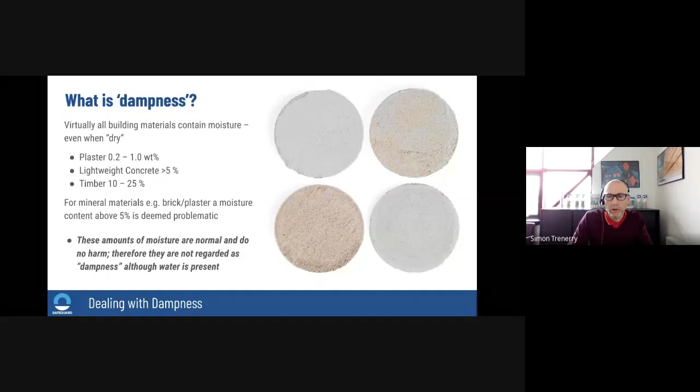What is dampness? Virtually all building materials contain certain trace levels of moisture, even when they're technically dry. So even dry plaster on a wall that's been up for, say, a year or two will still have a very small percentage of moisture, possibly 1%. Timber varies a lot in moisture, whether it's indoors, outdoors, whether it's treated, etc. Broadly, a certain amount of moisture in building materials is not an issue, and they're designed for that. However, when it reaches a certain point, it starts to cause structural and decorative damage, and in turn can also cause health issues for occupants of properties affected by dampness, and that's what we're going to be looking into today.

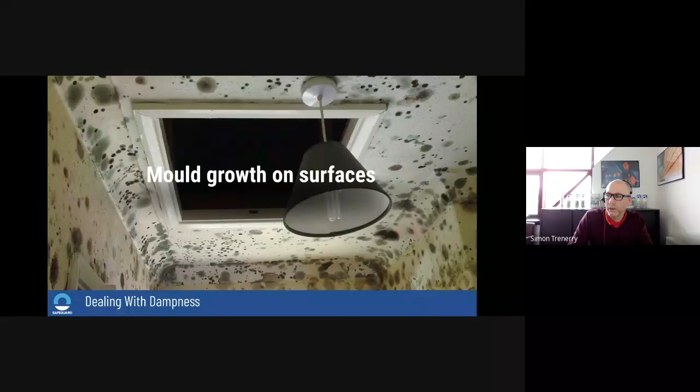Pooling of dampness—this is condensation, pooling of moisture, forming of moisture on the surface, absorbing into surfaces. That can often lead to a growth of mold on surfaces. Obviously this is an extreme example in this slide, but it can lead to that. It can also lead to damage. Even brickwork is not immune to damage by water. Bricks get sodden, and that can lead to frost damage as the moisture freezes and causes spalling, or also salts, which are transmitted in rising damp in particular, can also cause physical damage to building materials.

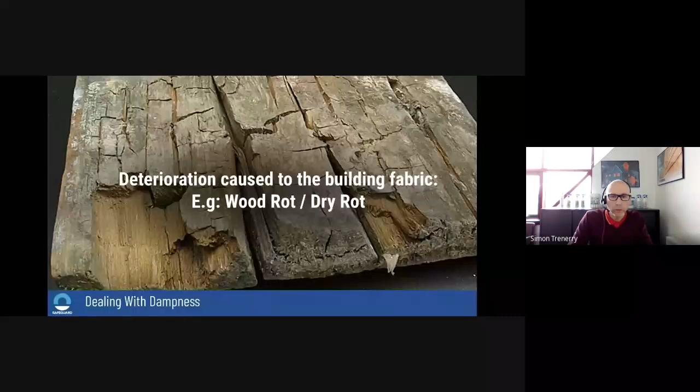And of course, dampness can cause deterioration to the building fabric. Where timber's concerned, it can lead to rots, and the presence of rot often in itself is an indicator of the presence of wood-boring insects, commonly referred to as woodworm. There is no one specific woodworm, it's a group of insects that are broadly colloquially called woodworm.

So why treat dampness? There are practical reasons to rectify and address all of the problems described on the previous slides, but also there's legislation and regulatory guidelines behind this. The Building Regulations Part C, which covers how buildings are built, the Housing Act, Decent Homes Standard, and the Homes (Fitness for Human Habitation) Act are all legislation or regulatory guidelines that govern living conditions within properties, particularly rented properties. Most of the legislation is towards rented properties, but there's also legislation that covers properties generally. The Housing Ombudsman, the parent body for the social housing sector, brought out a report back in 2021, Spotlight on Damp and Mould, which was a groundbreaking report and set strong guidelines for social housing providers on the services they need to provide and how they need to deal with tenants experiencing dampness and mould in their properties. So there are a lot of reasons to deal with dampness and mould, and we need to take it very seriously.

Another good reason is energy saving. Damp building components - and by components we mean the fabric of the building: bricks, blocks, plaster - are poor insulators. Wet walls conduct twice as much heat as dry walls. We're all trying to save energy, and we're all finding the rising costs of energy hurting our pockets. What can we do about it? Well, by keeping our buildings drier, less energy will go out through the walls, therefore we'll spend less on heating. It's a fairly simple equation in theory, though obviously it takes work to get there.

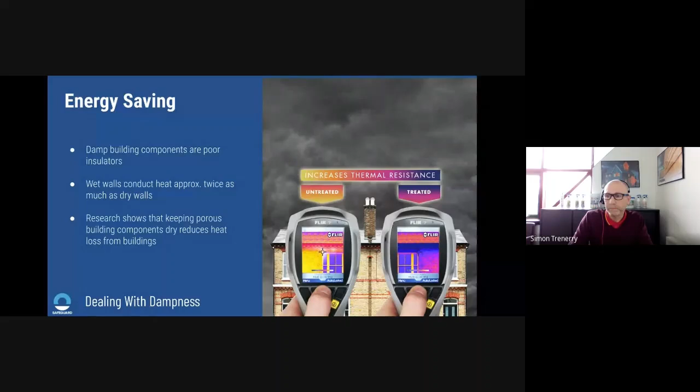So let's look now at the three main causes of dampness found in buildings. There's a principle to bear in mind: the key to dealing with dampness is the correct identification of the cause. We always encourage a principle followed by many contractors and industry professionals - a three-step process: identify the cause of the dampness, deal with the cause of the dampness, then carry out remedial treatments - replastering, redecorating, etc. Sometimes people don't understand this. They see dampness and straight away replaster, for example, and then the dampness comes back, because they're unaware of or haven't followed this principle. So it's an important principle, and I'd always encourage people to bear it in mind and follow it.

Penetrating damp is a very common form of dampness. Dampness comes in through the structure of the building, either through the walls or through the ceiling, and causes damage to the building. And then, of course, there's rising damp, which I'm sure many of us have heard of. We're going to explore these in a little bit more detail now.

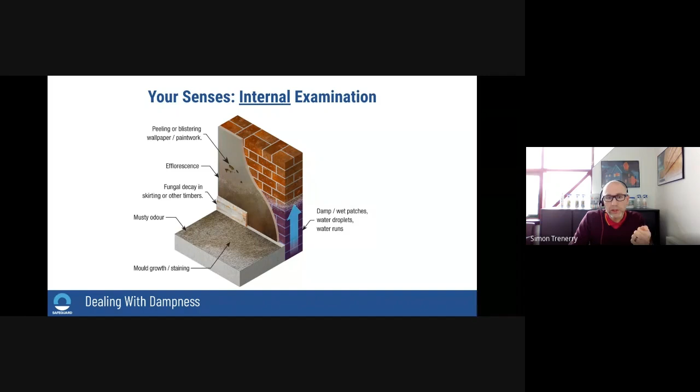a damp, musty smell is the first indication of dampness, particularly if you've got rising or penetrating damp. You can also use tools to help you. Moisture meters are commonly used to investigate all three kinds of dampness. Now, moisture meters are technically designed for detecting moisture in wood, but you can use them in other applications. Admittedly, if you use them on brickwork, on plaster, on paint, etc., then the readings they give are indicative, but you can still use those to build up a pattern of the dampness, which can often help with identification. And if you're dealing with moisture, with timber, they can give you an accurate reading on the levels of dampness, which then lets you know if you need to take action.

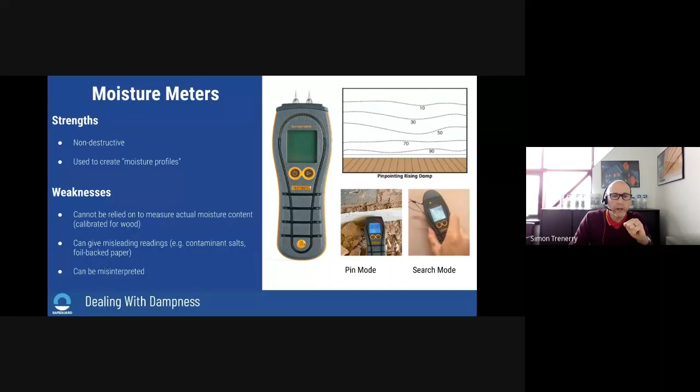As I mentioned, it's the most common form of dampness in buildings. Broadly, warm air, which you typically get inside a building, can hold more moisture than cold air. When that warm, moist air comes in contact with a cold surface, such as a cold window, it's cold outside, your house is warmed, middle of winter, it's a cold night outside, you've got warm, moist air in your house, that air then cools, that reduces its ability to contain moisture, and that moisture is then deposited on surfaces as a liquid. If it's an impervious surface, it forms as drops, and if it's an absorbent surface, such as plaster, perhaps timber, then it can be absorbed and can lead to damage.

This condensation, obviously, most properties will suffer from it at some time or another, but it's a problem that's actually getting worse, simply because as we insulate our buildings better, which is something we're all keen to do, to prevent energy loss, reduce our impact on the environment, and of course save us money, and because modern buildings are designed to be more airtight, this is great in many ways, but of course this reduces air movement in and out of a property, and then leads to the air getting warmer and carrying more moisture. And then if it does encounter a cold surface, such as an uninsulated external wall, cold window, etc., then that can lead to deposition and condensation. So condensation is actually becoming worse in modern houses rather than better, typically, of course.

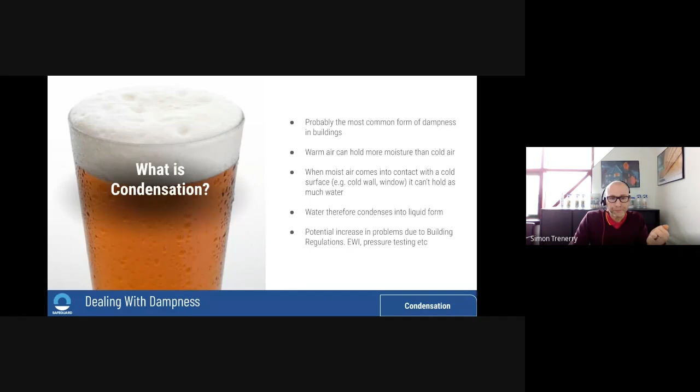So where does this moisture come from in properties? Well, when a new house is constructed, estimates are 4,000 litres of water are typically used when building a house. You've got water in the mortar, water in plaster, water in many elements of the house, which then takes time to dry off, which is when builders finish constructing a new house. They typically leave it for a few months to breathe, to dry out before the new owners are able to move in.

But in existing houses, we all produce moisture simply by breathing. So even when you're asleep, you're producing moisture, comes out through your pores, comes out in your breath. And of course, when you carry out normal human activities such as cooking, bathing, drying your washing, all the normal things we do as people, all of which create moisture. And also don't forget, in this day and age, many of us are living with more people in our houses than used to be. You've got extended families, you've got different generations living in, maybe grannies come to live with you, we've got houses in multiple occupation, so we've got higher occupancy levels, and of course we've got pets, they're breathing as well.

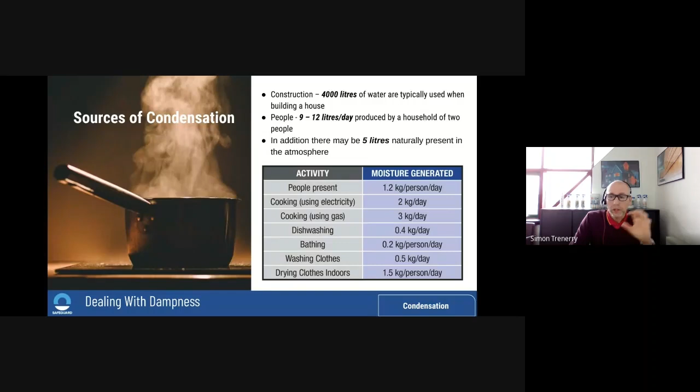So there's a lot of moisture generated in our properties, which then goes into the air and can lead to condensation. So as I'm sure you'll realise, condensation typically occurs in the cooler months. Why is that? We've got our window shut, we go out less, we crank the heating up, it's cold outside, so we're all indoors, we're all carrying out human activities, generating that moisture, that goes into the warm air in our heated homes, and then when that encounters a cold surface, that can lead to the deposition of condensation.

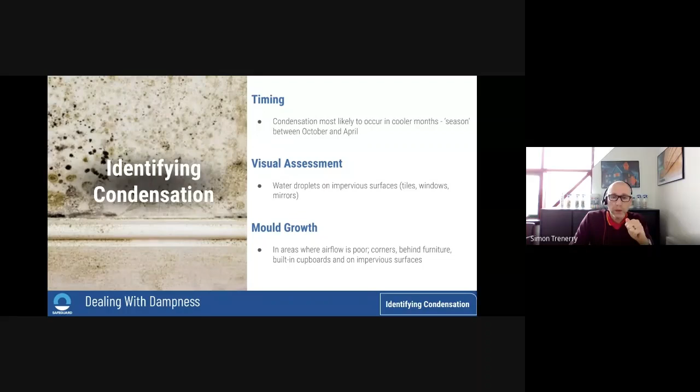Areas to look for: obviously windows, window sills, those kind of areas, but also where air flows poor, in corners, behind furniture, in cupboards - typical places where condensation forms, and then that can lead to mold growth.

So measuring condensation, separate to using a moisture meter, which can detect presence of condensation on a surface, but often we can typically see that. If you want to measure where the condensation is in your property and try and get a better grip on it, then there are a couple of tools you can use.

Surveyors often use hygrometers, which are handheld devices which measure the water vapour in the air. That's fine up to a point, but a more popular tool for measuring and mapping condensation and working out what's happened when is a data logger, which is a small device.

It's fixed either with Blu Tack, tape, possibly some kind of adhesive, into a corner of a home and just left for a while - weeks, possibly a month or two. The idea is it takes periodic readings over a period of time.

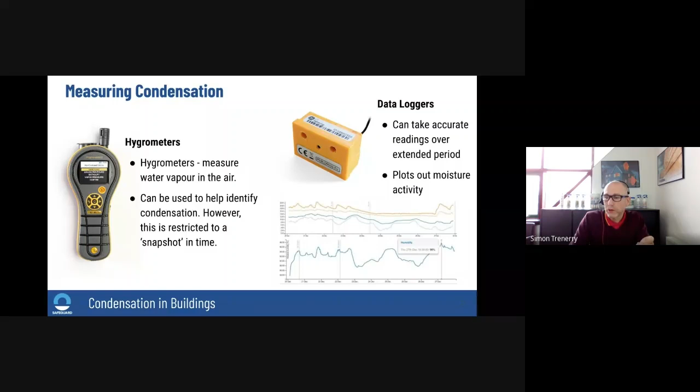These readings are downloaded onto computer software, and then that's used to map graphs similar to the ones in this slide here, which can then be used to plot when the condensation's happening, and plot that in terms of temperatures and humidity, and try and work out what's causing it and why it's happening. Sometimes where there are issues with condensation that people just can't get to the bottom of, data loggers are an ideal tool to identify what's happening and why.

So condensation, the formation of condensation itself isn't necessarily a problem, but the water itself - it's very pure water, it's distilled water - but it provides the ideal medium for mold growth, which is a concern for many of us, because not only does it look awful, but it can have a potential impact on human health.

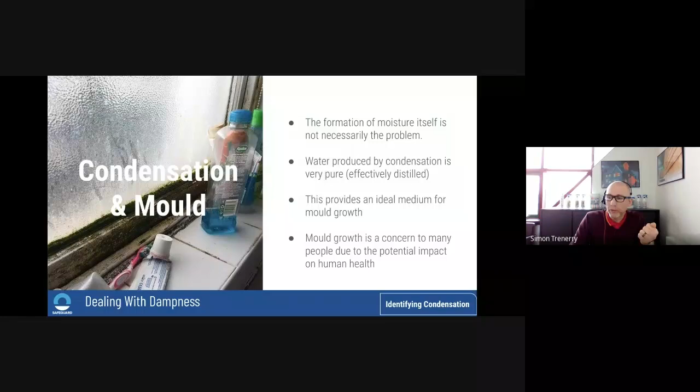So dealing with condensation and mold growth, what can we do about this? Well, in theory, reduce moisture production. Open your windows - okay, easier said than done, particularly in winter. We don't want our heating to all go straight out the window.

Drying clothes outdoors, again fine in summer, but what can you do in winter? You need to dry them indoors. Vent your tumble dryer outside - if you've got one, that's fine, if you've got an outside wall to vent it through.

Use of gas and electric cookers, okay, but you've got to cook. Extractor fans, great if you've got one fitted, not every property has. And again, keeping trickle vents open can help to get that damp, moist air outside, if you've got trickle vents.

So these are great solutions in theory. Whether they're practical, well, that's debatable, but certainly it's worth bearing in mind they are, in theory, simple and cheap ways to deal with condensation.

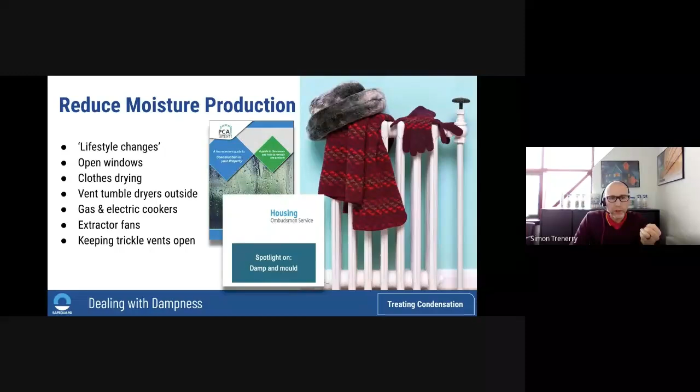Increasing the air temperature, again in theory, by keeping the air consistently warm, you will keep that air - it will still have the ability to carry that moisture and be less chance of it being deposited on surfaces as condensation. Again, fine in theory, but when we're all finding the cost of heating our homes is hurting our pockets more and more, we may not have the ability to do this. So again, this is another solution that is great in theory. Whether it's practically possible depends on our individual circumstances.

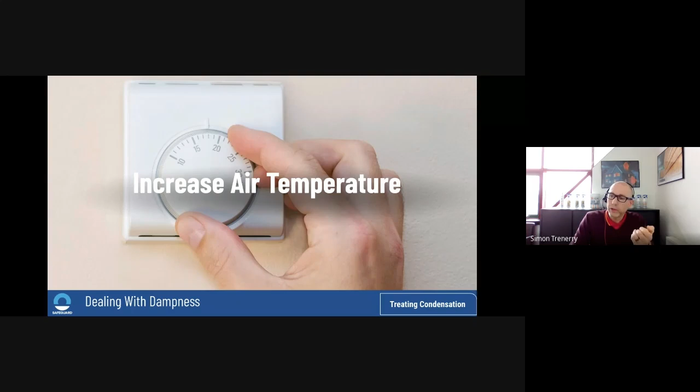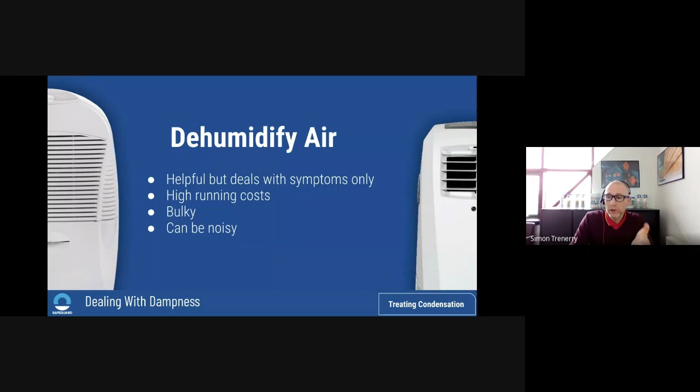Using dehumidifiers to treat condensation - this is one solution, but again it's another one where perhaps it's better as a theoretical solution than a practical solution. It deals with the symptoms of condensation only, by reducing the moisture load in the air, but with high running costs, they use electricity. They're quite bulky, they can take up a lot of space - depending on the size of your property, might not be something you can deal with - and they can be noisy to run, and typically they run at night when you're trying to sleep. So again, this is a solution, not necessarily practical.

Improving ventilation, this can help. If you've got air bricks, make sure they're unblocked. If you've got trickle vents, leave them open, though in all fairness, along with the air going out, you will lose a certain amount of heat. If you've got an extractor fan fitted, consider changing it. If it's a traditional timer extractor fan that runs for a few minutes after you've turned the light off in the kitchen or bathroom or wherever you've got it located, that's fine, but when the timer switches off, that won't necessarily have set the humidity to where you want it to be.

So consider replacing that with a humidistat fan, which is a fan with a sensor that detects humidity to a certain level you set when it's installed, and it just runs as needed. These are very useful.

Or positive pressure units. These are very popular over in Europe and are increasingly being fitted to new properties. Not so easy to fit to existing property because they're fitted in a loft, so if you've got a loft conversion, you'll struggle to find somewhere to fit the fans. They also use ducting to move air around your property, bringing air in from outside and forcing it around. The idea is to encourage air movement and get that warm, moist air outside before it comes into contact with a cold surface.

So they're great in theory, but as a retrofit, not necessarily so practical, because the ducting's got to be run somewhere, which can involve taking ceilings down or floorboards up. Not necessarily practical for every property, and as I mentioned, it depends on whether you've got space in the loft. But basically, we work on the principle of moving warm, moist air outside before it's got a chance to condense on a surface.

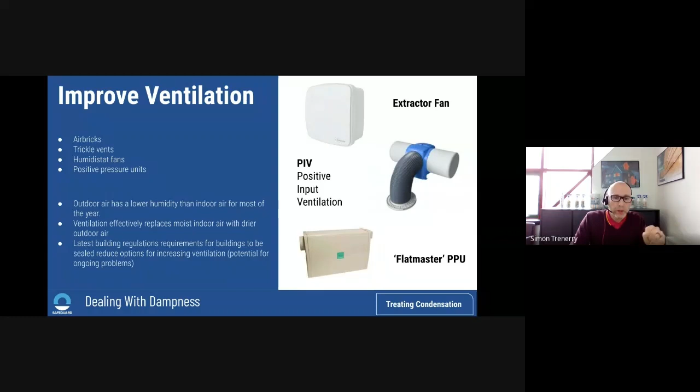So, preventative measures, taking all of the previous solutions into account. You can't reduce moisture production. Keeping your heating up isn't necessarily practical from an affordability perspective. You might not be in a position to fit or change an extractor fan, or run a dehumidifier. So what else can you do? You've got condensation forming in your property, you know it's happening - what solutions can you apply other than that?

You can use anti-condensation paint. These are a version of emulsion paints, but they've got small glass spheres in them, which slightly increases the temperature of the surface the paint is applied to and reduces the risk of condensation forming. Drawback with these: the paint has a rough surface, as the glass spheres don't give it the usual smooth finish we're used to. Some people don't like that.

It only comes in a limited range of colours, so it may not be suited for every property, because you might not want your house in magnolia or white or whatever. Also, it makes a small difference, but depending on the severity of the condensation issue, it might not be enough to deal with it. So it's one solution, typically used in small problem areas - if you've got a corner of a cupboard or a room prone to condensation, this is a great solution, but it's not often used on larger areas like whole rooms.

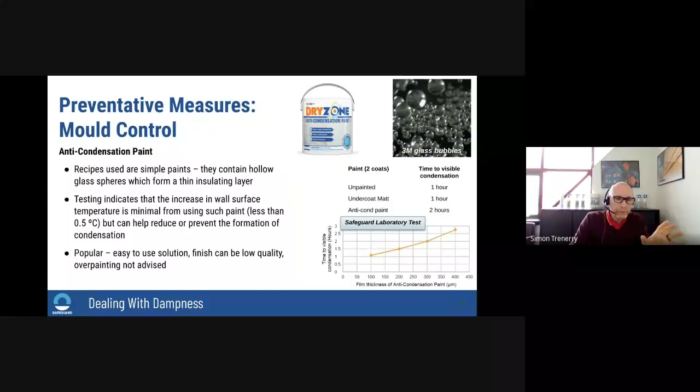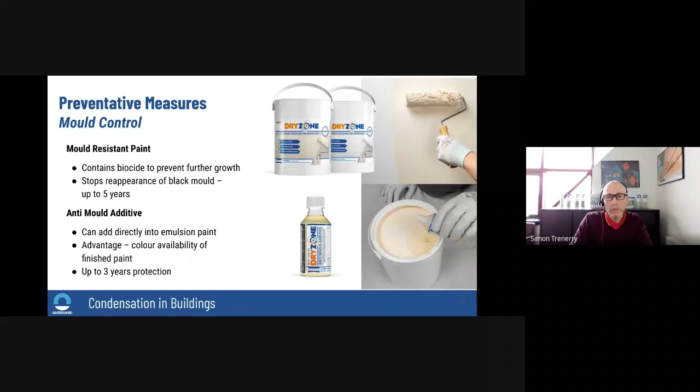A more popular solution is anti-mold paint, or mold resistant paint. These are normal emulsion paints used the same way as any other emulsion on a wall, but they've got a biocide in them. They come in two forms. We supply them ready mixed, with precise amounts of biocide applied to specific paints we supply, and they'll stop the appearance of black mold for up to 5 years. Condensation can still potentially form on the walls, but because of the biocide, no mold will form.

Drawback with these pre-made paints is a limited range of colours. So if you particularly want a specific colour or brand type of paint - there are lots of decorating suppliers out there doing thousands of different colours and types - and you want something not covered in our range, then anti-mold additive is the solution. It's a simple additive mixed in with whichever emulsion paint you choose, and it's a biocide again, giving up to 3 years worth of protection. Typically, people redecorate after 3 years anyway, so that protection is often enough.

And these solutions are really, really popular, both with private and social sector landlords, simply because they can be applied between tenants. From a landlord's perspective, it removes any concern about mold forming - you've carried out your responsibilities and due diligence, and it means less concern about decorative spoiling at the end of a tenancy. And of course, tenants like them too, because if these are applied, they don't have to worry about mold formation through their normal activities like cooking and washing.

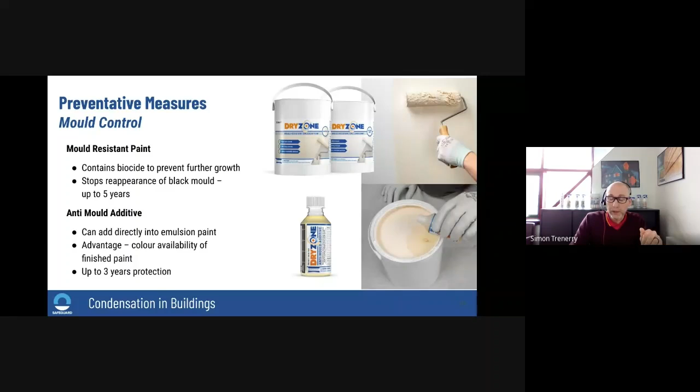These are popular solutions, and incidentally relatively inexpensive. Anti-mold sealant - I'm sure we've all seen these, and many of us use them. When you're having decorative work carried out, a new bathroom fitted, new kitchen fitted, new loo, whatever, use an anti-mold sealant. It's a standard silicone sealant, but it's got a biocide in it. It stops mold forming, because if you use standard silicone sealants, you can get black mold forming on those very, very quickly after they've been installed.

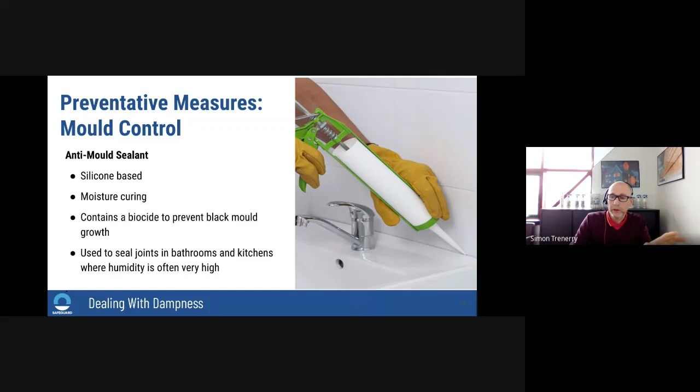Another solution to deal with mold is removing the mold itself. Traditionally, people used to just wipe the mold away or use bleach. Unfortunately, mold - think of it in terms of a plant. There's the black mold you see, but it's also got roots. So if you use warm soapy water, or bleach, all you're doing is taking the mold off at the top. You're leaving the roots in there, which grow back very quickly. In fact, when you're wiping it in that fashion, you're actually spreading the mold, and typically the mold problem gets worse when you've used those solutions.

So the modern solution is to use a two-step product, a mold eliminator and sanitizer. You spray the mold eliminator on, leave it a few minutes to work, wipe it off, spray the sanitizer on, leave it a few minutes to work, then wipe it off and give the surface a good wipe over. So you've killed the mold and removed it. Then if you paint over with a mold resistant paint, the ones we've just discussed, you've got a nice brand new surface that's mold resistant and prevents the formation of mold. This is a really popular solution where you've got, for example, mold on your bathroom ceiling. Apply this - again, all inexpensive products, easily applied, and they do a great job. Very well worth considering.

I've covered a lot of this, but incidentally, the mold eliminator and sanitizer, we supply it in a couple of forms. Small handy spray bottles that can be used by anybody - keep them in your bathroom, have them at hand. But we also now supply in larger commercial packs. This is aimed at, for example, social landlords - you might be a housing association with 5,000 properties, and you want to go around and treat all your properties over the winter. We supply in large bottles, large containers with sprayers, so it can be used by teams carrying out maintenance work. That's very popular, particularly with commercial customers of ours.

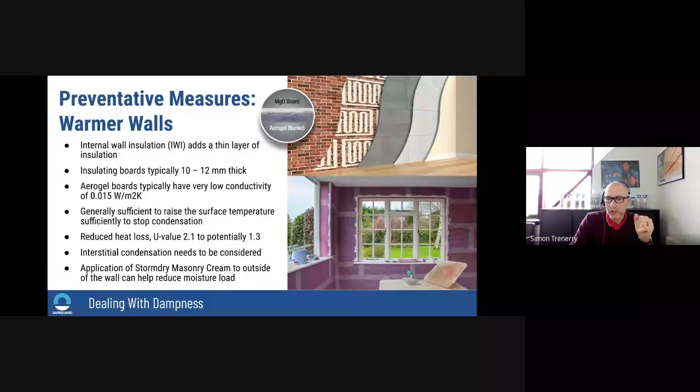These are typically used in conjunction with Stormdry Masonry Cream, so not only does it keep the wall drier, but if you have a cavity wall, it also reduces the potential for interstitial condensation.

EP board is one of the two insulations we do of this thin insulation type. It's easy to install, basically adhered to the wall using adhesive. It saves space and it's also breathable, so it doesn't reduce the wall's ability for moisture transfer.

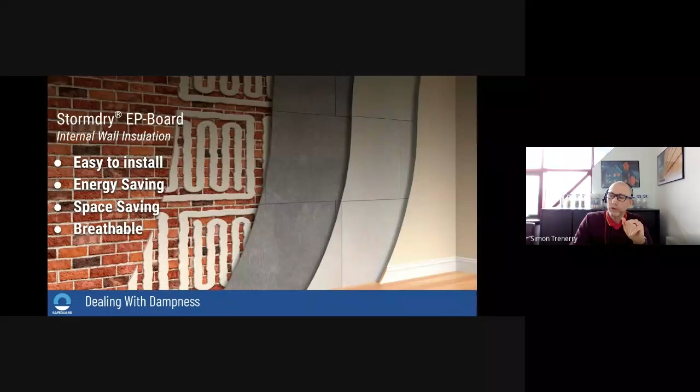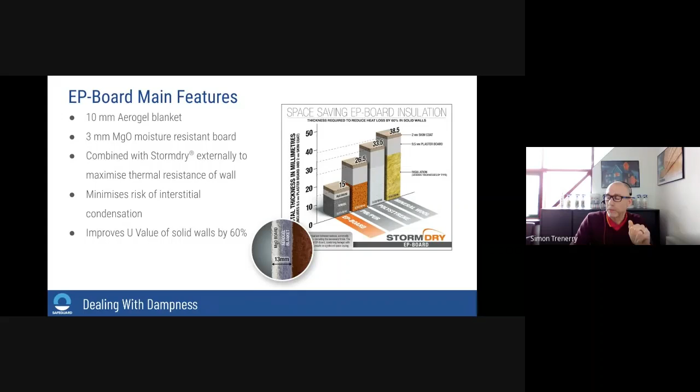So it shows how well these types of insulation perform—they make a big difference. However, there is a trade-off: per square meter, these kinds of insulation are more expensive than the thicker ones. You pay your money, you take your choice. But if space is your primary goal as well as heat saving, these are well worth considering, and they do a great job at reducing the likelihood of condensation forming.

Our other version is Ultrotherm, which again is similar to EP board in that it's adhered to the wall, creates a warmer surface, and cuts down energy loss, but doesn't perform to quite the same high level as EP board. So you're better off considering this more as a solution just to help prevent the formation of condensation.

So if you've got, for example, a wall or room particularly prone to condensation forming on the walls—maybe it's north facing or coastal facing, single skin, with a lot of issues with condensation forming—this is worth looking at as a solution.

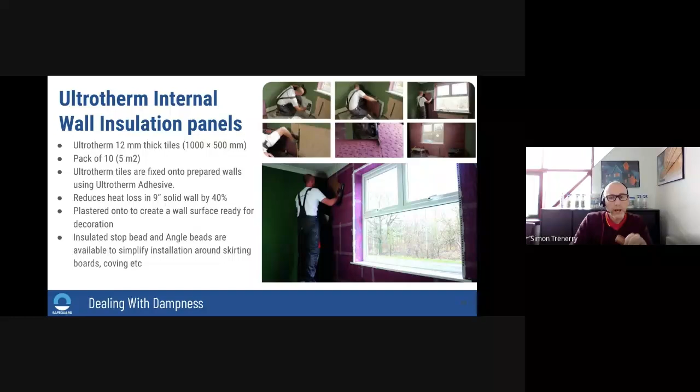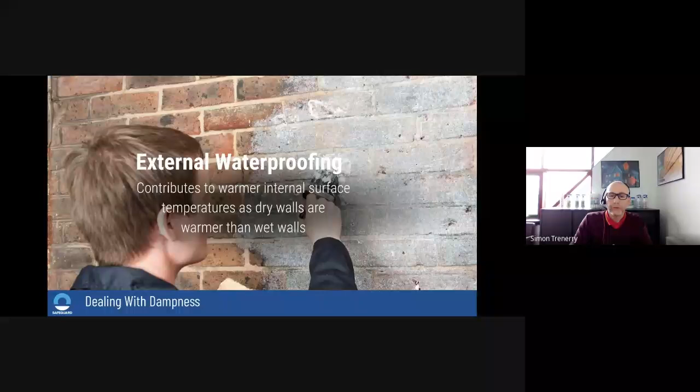Another solution you can use is external waterproofing. This contributes to warmer internal surfaces because dry walls transmit less thermal energy than wet walls. If you can keep that wall dry by applying a waterproofer, the wall will transmit less thermal energy—the inner face will be warmer and you'll lose less heat through it. Again, this is a very popular solution.

Okay, let's look at penetrating damp now. As I mentioned earlier, penetrating damp can come in through the roof or through walls. We don't get involved in roofs other than in relation to chimneys, so we won't cover roofs, but it's worth bearing in mind that roofs are one vector for penetrating damp. Typically it's more likely to enter through the walls, and it can enter through single or cavity skin walls, through wall ties, or through cavity wall insulation, which we're going to look at now.

Just bear with me a second, please—I'm just going to grab a mouthful of water.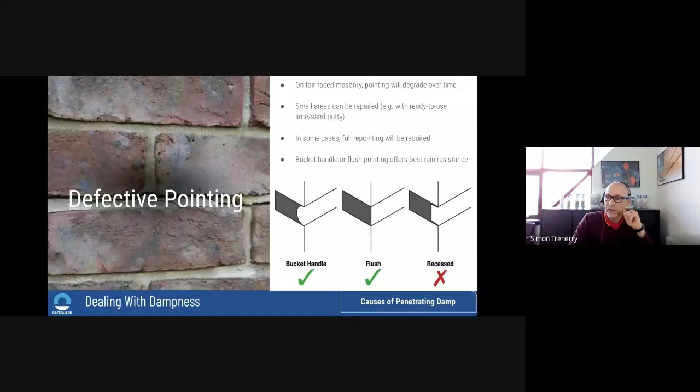And here's an example of mortar not being in great condition. Pointing on walls, depending on how the wall's pointed, the age and condition of pointing, is a very common vector for moisture coming in. In this slide you can see some cracking just over there next to the pointing, and that can allow moisture to get into the building. Also the shape of the pointing matters - there are 3 examples here. Pointing should be either bucket handled, so it's concave, so even wind-driven rain will go in there and run off, or if it's flush it will run off. But recessed pointing, which was very popular in the 70s and 80s, can effectively form a recess where moisture will sit in, and if it's not blown away by the wind or doesn't evaporate, that can work its way into the building and lead to penetrating damp happening.

Defective flashings, another common cause. A lot of flashings are at high level - abutments from flat roofs, abutments around chimneys, etc. People can often not be aware that where these are chased into the wall, they've come away, or the flashing itself is deteriorating, and this can be a vector for moisture ingress.

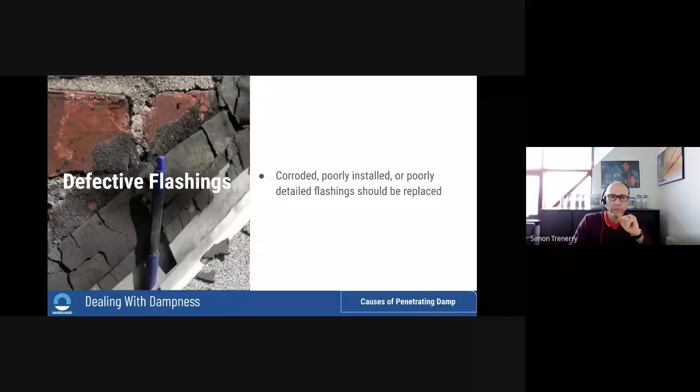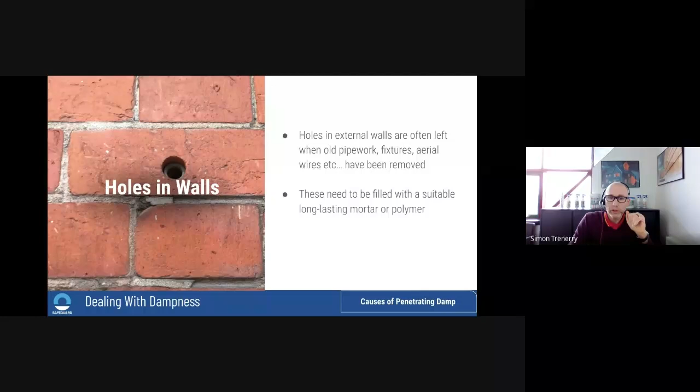Holes in walls - cable entries, you used to have a satellite dish fitted, now you've got cable or something different, that's taken away but the hole's not filled. Pipes that came through the wall, all kinds of reasons we can have holes in our walls. Old extractor fans that have been removed - these can be vectors for moisture, so they're worth assessing and dealing with if you've got issues.

And faulty window and door seals. Up until the modern day of double glazing, typically windows were sealed with cement or linseed putty. That doesn't last forever, and even modern sealants don't last forever. When I had my double glazing replaced last year - it was originally installed in my house when it was built in 1983 - the sealant all around the windows had gone completely brittle, actually like mortar, so brittle it was cracking. I didn't have moisture ingress, but I could have done. So even with modern windows, it's worth bearing in mind that sealants don't last forever, they're vulnerable to UV and will eventually break down. So when you're looking for moisture vectors, that's worth considering.

Porous masonry is another one. It wasn't uncommon in Victorian times for bricks that were fired for internal use to be used on external walls.

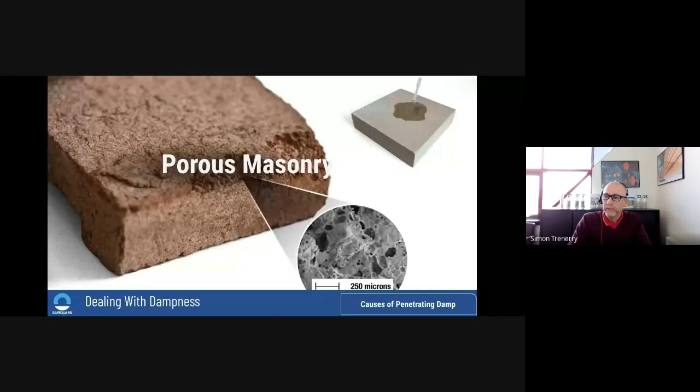So bricks were vectors for moisture, and obviously bricks can be subject to the effects of weathering, pollution, and spalling, which can start to break down the surface. You may not be aware, but bricks are porous anyway, so they're designed for a certain amount of moisture to penetrate, which then leaves the brick due to weathering and the sun.

But depending on the condition of the brick and the weather conditions outside, that moisture can potentially penetrate to the inside of the property. Cavity walls are another possible vector for penetrating damp. When the wall's built, they use wall ties between the inner and outer skin. Older wall ties didn't have a twist in the middle, so if moisture got in, they could act as flat vectors for moisture to run across.

Also, when the wall's built, if the bricklayer constructing it didn't deal with mortar drips inside, or didn't wipe away the backside of the bricks, mortar could drop down onto these ties. As we've already explored, mortar is a great conduit for moisture to travel through. As you can see in this image, you've got a wall tie there covered in mortar, effectively acting as a bridge across the cavity. Rain hit the outside, came through the bricks, and travelled across to the inner skin via that mortar, eventually working its way through and causing damp patches in your living room, bedroom, or wherever.

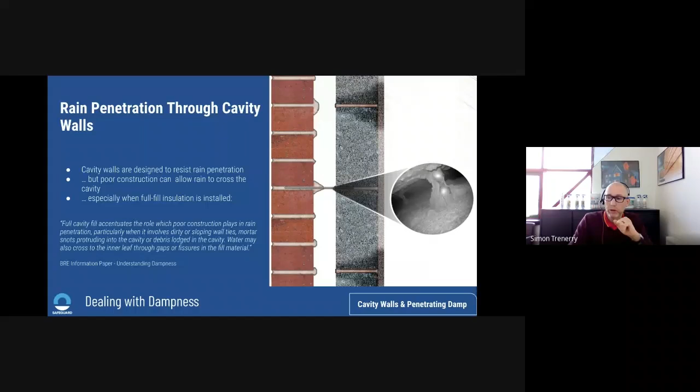Cavity fill insulation - I'm sure we've all heard horror stories about people having issues with this. Cavity insulation is great if you've got a cavity wall. In theory, it's a brilliant solution because it keeps your property warm, doesn't affect the inside space, doesn't affect the aesthetics, and it's great as long as it stays dry. But if moisture comes through the brickwork and gets into that insulation, once it's wet, instead of preventing loss of energy, it actually allows thermal energy from inside to travel outside, and it also acts as a conduit for moisture to come into the inner walls. So that's something to consider as a possible cause of penetrating damp if you're seeing dampness in your property.

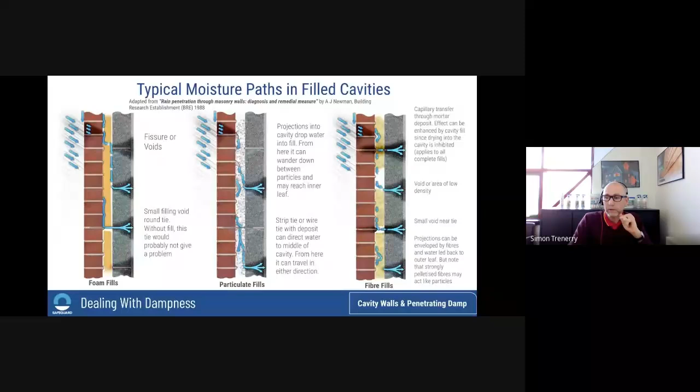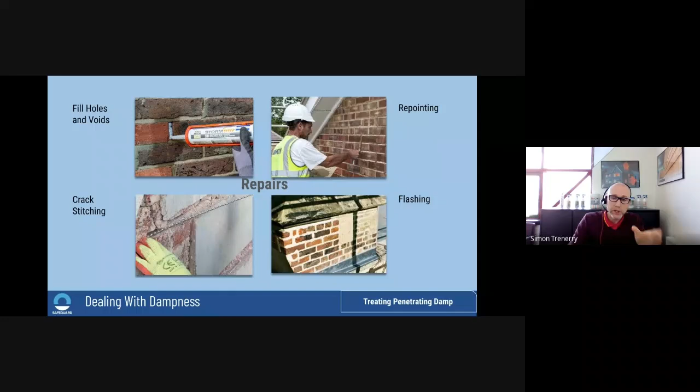So what can we do to treat penetrating damp? A lot of the solutions are very straightforward. You can fill holes and voids in brickwork, replace your pointing, and it's a good idea when replacing pointing to use a mortar additive. We supply a mortar additive which makes the mortar waterproof but breathable - it's worth doing. If you've got cracks in the brickwork, repair those using crack stitching kits, and replace flashings that have failed. They're all relatively easy, relatively inexpensive solutions.

Coatings on the outside of brickwork are a little bit of a double-edged sword. If brickwork's painted outside and that paint starts to crack and weather, moisture can get in behind it and cause the paint to delaminate, come away from the surface, and start to break up. But that can also trap moisture, which can then penetrate inside. So paints are great in good condition, but as they start to weather and break down - perhaps cracking because the building moved in the summer, or it's had a lot of sun, or mechanical damage - they can cause more problems than they save.

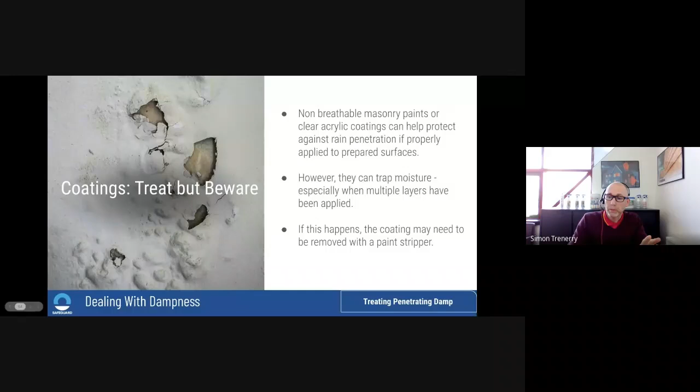Painting over them only adds to the problem, because if you paint over this kind of damage, you're trapping moisture underneath. That moisture is going to go somewhere, and you're going to get problems with the new paint blistering as well, and that moisture is still likely to work its way inside. So if you've got damage to external paint, it's worth simply taking it all off and replacing it.

Much the same applies to render. In this particular image, you've got concrete render on the wall, which is great - it's weatherproof and new - but you can see there's lots of cracks, and you can see where a hole has formed and moisture's got behind, causing this big staining here. If you just patched up that particular area of render, all you're doing is trapping moisture, and that moisture is going to go one of two ways, probably both - causing more damage to the existing render and adding to the problems of moisture getting in, with some of it tracking inside. So really your solution there is to replace all of the render.

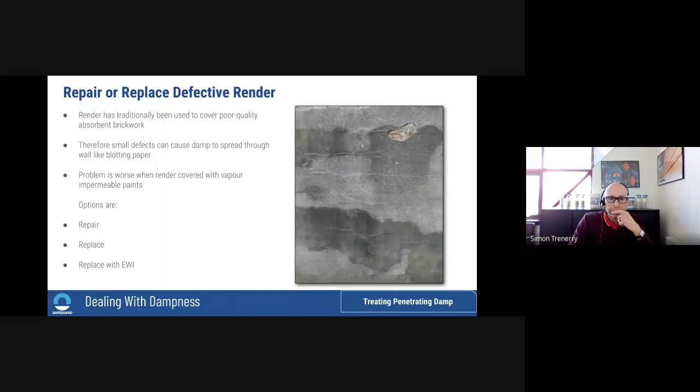A solution you can use for this: if your wall is rendered but not painted, or if it's unrendered, then you can apply a masonry protection cream to waterproof your wall. We reference Stormdry here, which is our masonry protection cream.

As many of you are aware, Stormdry is the leading masonry protection cream. We're very proud of it. But applying a masonry protectant is very common - a lot of people do it.

The cheaper ones do a reasonable job but only last for a year or two. Products such as Stormdry will last for many, many years. Ours has got a BBA certificate for 25 years, but these do a couple of important jobs in your property, and it's worth bearing in mind.

Firstly, by waterproofing your wall by applying a masonry protection cream, that stops water penetrating into the brickwork, so it reduces the likelihood of any penetrating damp getting through. And as we referenced earlier, dry walls transmit less thermal energy, so it keeps your walls warmer inside, reduces the likelihood of condensation forming, and you'll lose less energy through your walls.

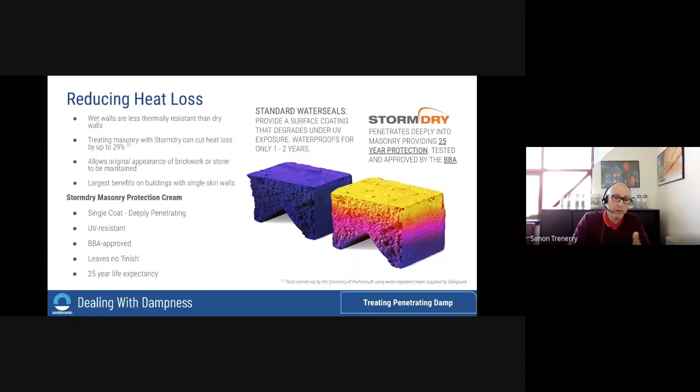So there's a lot of good reasons to apply them, and arguably they could be applied to every single wall of every property. Even if you haven't got penetrating damp, we all want to reduce energy loss on our properties, and we all want to prevent penetrating damp. So arguably, even if you bought a brand new house, you could apply a masonry protection product such as Stormdry to the outside, and there'd be a good reason to do so.

Right, let's have a quick look at rising damp. So what is rising damp? We've all heard of it, but not all of us know what it is. It's commonly used, can affect all kinds of properties. It's not limited to older Victorian and Georgian properties - it can affect new properties.

I dealt with a technical inquiry from a customer the other day. He's had an extension built on his property 4 or 5 years ago, and he's now got rising damp coming in, all kinds of decorative spoiling. It turns out the builder didn't put a damp proof course in the wall. This extension was built, I think, 2018, 2019, just around lockdown, and this customer's got rising damp. So it's not a Victorian problem, it's a 21st century problem, and it can happen to any property.

So what is rising damp? As I mentioned earlier, bricks and blocks are actually hollow, and due to capillary action, which is a scientifically proven phenomenon, water can travel through very small spaces, and it can travel vertically. If you imagine - I'm sure it's happened to all of us - we've paddled in the sea, or stood in a puddle, got the bottom of our trousers wet, and that moisture's traveled up our trousers and reached our knees, even if we've only got the bottom of our trousers wet.

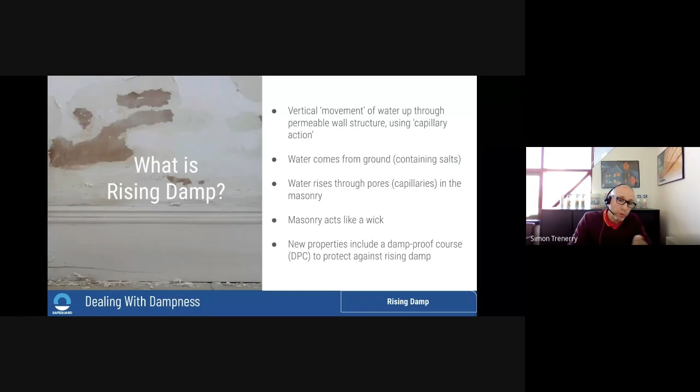That's exactly the same principle that happens in rising damp. Dampness in the ground - typically it happens in properties where the brickwork or masonry is at ground level and it's touching a source of moisture such as the ground, and that moisture naturally rises up through the brick and causes rising damp. So the masonry itself acts as a wick. Protection against this should be a damp proof course, which should be fitted in certainly every wall built since 1875, but it's not always the case.

So what does it look like? Well, it looks like staining, typically at low level. And when I say low level, it's rare to see it much above 1 to 1.2 meters, occasionally 1.5. Now, in theory, rising damp can rise to 5 meters, but in practical terms, evaporation takes hold and it rarely gets much past a meter. So typically, in most properties, it gets up to maybe a meter or so before people do something about it. But here's some examples.

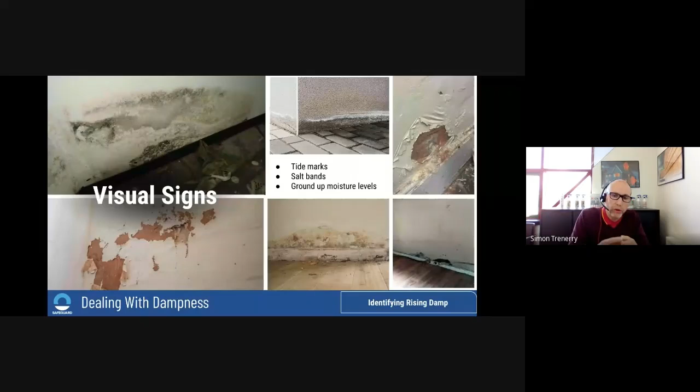Worth bearing in mind as well with rising damp, quite often you see a white salt band at the top. There are naturally occurring salts in the soil, which are minerals in very small quantities - some are produced by human activities, some have been there since the earth was formed, but they're small amounts of minerals. These get dissolved in water, and as the water rises up in the wall, it brings the salts with it. Eventually, some of that moisture evaporates, but the salts don't evaporate - they end up trapped in the brickwork, leaving behind this white tide mark.

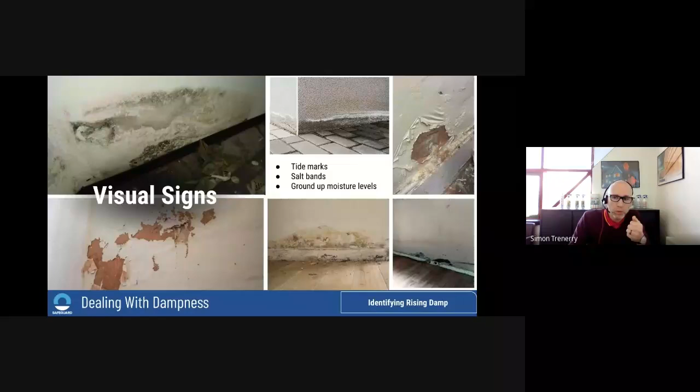So how can you detect rising damp? Well, I mentioned earlier moisture meters, and these are very useful for taking indicative readings. You take readings up the wall with these meters. They're designed for use with timber, so they give an accurate reading in wood, but when you use them on other surfaces such as a plaster wall or brickwork, they give an indicative reading.

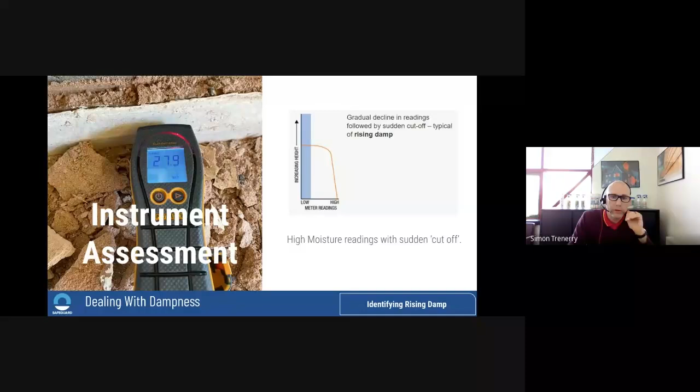For example, if you used a meter and it said 90 or 70, it doesn't mean your wall is 90 or 70% wet. It means it's very wet, but you treat them as indicative and use random readings taken across the wall to build up a picture of where the dampness is, and that gives you a guide for where you need to treat.

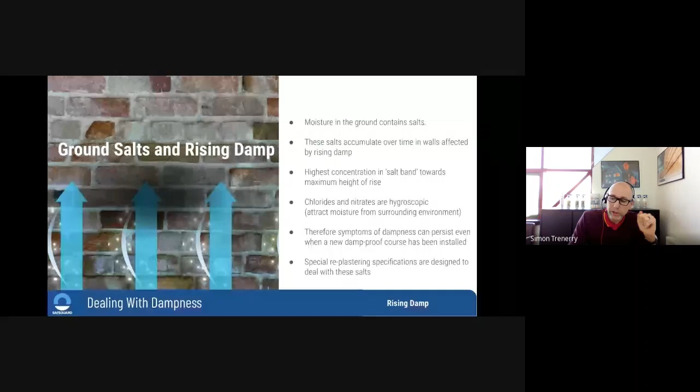Moisture in the ground contains salts, and these salts accumulate over time in walls affected by rising damp. Typically they form towards the top of the rising damp, and they're quite obvious, often seen on brickwork, or when you take plaster off walls you'll see them behind, but they can also come through to the plaster.

So, rising damp - is it rising damp coming up through the wall, or is there actually a DPC present that's been bridged? There are a number of ways that an existing damp-proof course can be bridged, and it's surprisingly common. We get lots of technical inquiries from customers who've got rising damp, and the simplest cause is when a DPC is installed on an external wall - it's installed 150 mil above ground level, so 6 inches, typically 2, possibly 3 mortar courses above ground level.

Of course, what happens over time - we might put in raised flower beds, or more typically pave our drive or put paving around the edge of our property. This raises the ground level, and this can cause the DPC to be bridged. This is quite common. Also, you can sometimes get rubble or mortar from when the wall was built in the cavity, which can bridge the DPC.

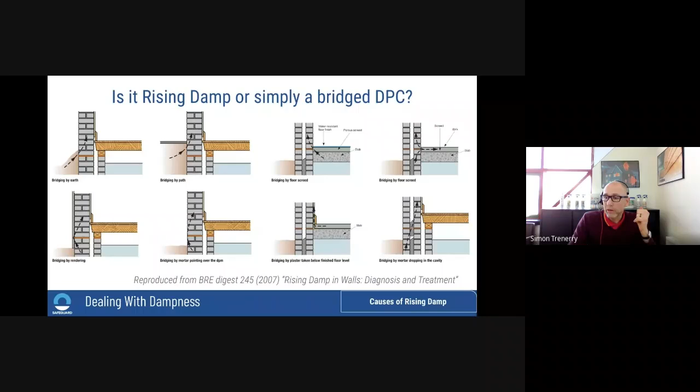If you've got a cavity wall, the DPC can be bridged due to the construction of the wall, or dirt getting into the cavities. There's a lot of ways the DPC can be bridged. So if you've got rising damp, there are lots of ways you can investigate whether you've got a missing DPC or whether there's something simpler you can do, such as reducing an exterior ground level that's been raised.

So internally, what can you do to address rising damp? Tanking over the rising damp, or covering up, as it's colloquially known. Often people do this because they don't realise what's happening. Remember, I mentioned earlier the 3-stage principle: identifying the cause, dealing with the cause, and then applying a solution.

Well, this is quite common - this is step 3. They see signs of dampness, they don't understand what it is, they don't know what to do about it, but they replaster over the top, repaper over the top, repaint. Totally understandable. But what happens? Well, the dampness hasn't gone away. All you're doing by covering it is hiding it, but it will come through again.

Either on your newly replastered wall coming straight through - I've just had a customer contact me in a technical ticket 3 months after applying some replastering, the damp's back. Why was that? Because they didn't understand what they were doing and didn't apply remedial measures, didn't apply a solution before applying remedial measures.

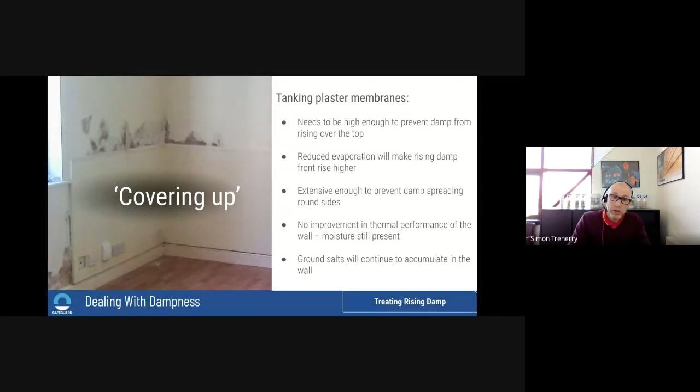Or in this example, where you can see on this slide, it looks like plasterboard's been applied to the wall over where the dampness is, and that's simply prevented the dampness evaporating, so it's come up behind the plasterboard and appeared over the top. So these short-term solutions are just that - you're not dealing with the problem and you're not resolving it long-term.

So what can you do about it? If you've got a DPC missing, for example, hasn't been built into the property - either an older property or a modern property where it was missed out - you can reapply a physical DPC. However, this is very difficult to do. It's got to be done in small sections so that there's no disturbance or potential collapse of the wall. It's noisy, it's difficult to do.

If there are party walls involved, then there can be issues around that, and it requires a lot of skill to do. And of course, if you're getting a contractor to do it, it's very expensive because of the time it will take, and it's a skilled job. So in theory, you can retrospectively apply a physical DPC, but in practical terms, it's very rarely done.

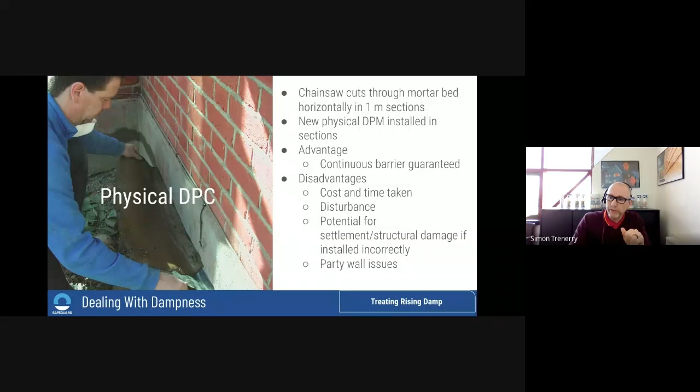Chemical DPCs are the more modern solution, and this is the most popular solution for creating a DPC worldwide. Fairly straightforward and easy to do.

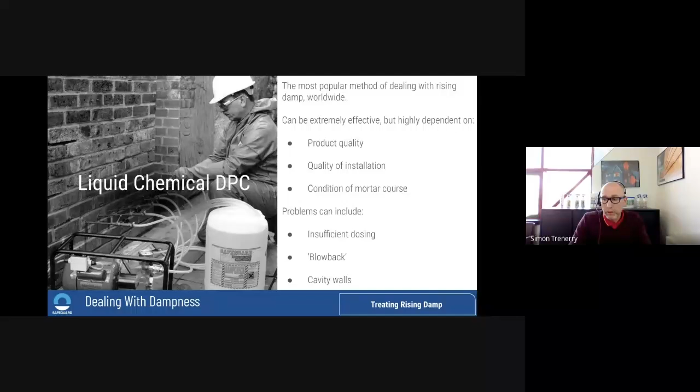And this method worked. It was revolutionary when it first came out in the 60s, but it's been superseded by modern methods such as damp proofing creams. First one was introduced in the year 2000 by us. So we're very proud of this.

Great system, absolutely revolutionary, performs almost as well as a physical DPC. And the benefit with the creams, they're low hazard, there's no fumes, they're not toxic, they're not caustic. You can get them on your hands, you'd want to wash them off, you wouldn't want to leave them there for long, but it won't burn you, they won't hurt you.

Great system. Still massive seller for us, still very commonly used and copied by many of our competitors. They're great systems. Only drawback perhaps of the system, it does require some skill to inject the correct amount of product into the hole. So you can under inject or you can over inject. So it does require some skill and experience to do effectively.

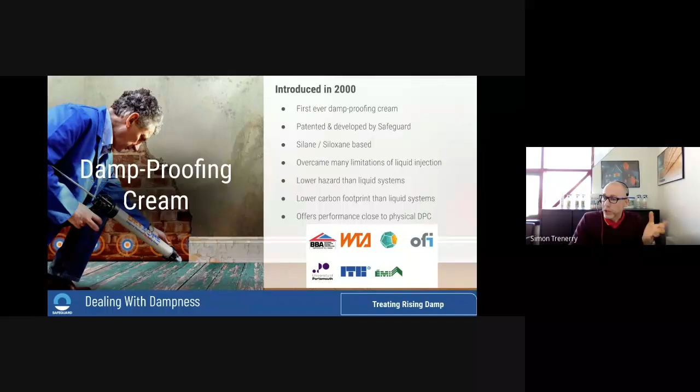So we have come out with an improved version in 2014. It's effectively a Mark II version of the cream. You've got pre-dosed cotton rods, so about the length of a biro, and you drill a hole in the mortar course, exactly the same as with the cream, and then you simply insert the rod, and then once it's had time, a couple of weeks to dissipate, then you can seal the hole and leave it to carry out its job.

The rod is pre-dosed with chemicals in the factory, so as long as you've drilled the hole to the right depth, the right distance from other holes, as long as it's in the right substrate, the chemicals simply dissipate and create a chemical DPC with no more effort required by the installer. And they're really quick and easy to do because it's pre-dosed. You simply push the rod in the hole, job done, move on to the next one. So again, very easy to do. It takes you longer to drill the hole than it does to insert the rod and create the DPC.

Very effective system, and worth bearing in mind as well that both the cream that I just referenced and the rods are both BBA approved. So understandably, as consumers, you might be skeptical about some of the claims we make about our products, understandably, but they've been independently tested and certified by the BBA. The BBA certificate's freely available on our website or from the BBA's website. So they're an independent testing body who test construction products in laboratories, and they then produce a report which says the product will do this, this, and this, and it won't do this, this, and this. So for you as a consumer, you can read that and take that as read because that's come from an independent testing body.

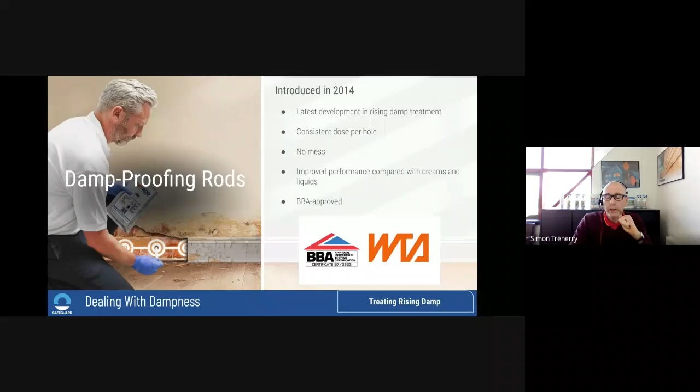So after creating a chemical DPC, obviously part of the issue with rising damp, you've got the decorative spoiling and you've got the dampness.

The decorative spoiling has affected your plaster and your paint, and you need to do something about that. You can't just leave it. Part of creating the chemical DPC anyway, you've got to take the plaster off the wall to inject into the brickwork to the right depth. But also salt contaminated plaster needs to be replaced because there's dampness already in the wall, which will keep coming through onto the plaster. And even when you've created a chemical DPC and stopped dampness rising any further, you've still got dampness in that wall that's still going to want to come out.

So unless you want to leave your wall damaged, stained and damp, you need to do something about it. British Standard 6576 is the code of practice for the diagnosis of rising damp in walls and the creation of chemical damp-proof courses. The guidelines are that existing plaster should be removed either to 1 metre above the DPC line, often taken to be 1.2 metre above the floor if there isn't a DPC line, or to 300 mil above the highest level at which dampness is detectable.

The point here is dampness within plaster isn't always visible. You can map it with a moisture meter, but quite often, just to be on the safe side, people will remove the plaster maybe up to 1.5 metres or possibly the entire wall and replaster it. It's also worth bearing in mind that dampness in that wall contains salts. So if you replaster with standard gypsum plaster, that dampness will come through again, as will the salts, and you'll effectively be back to square one.

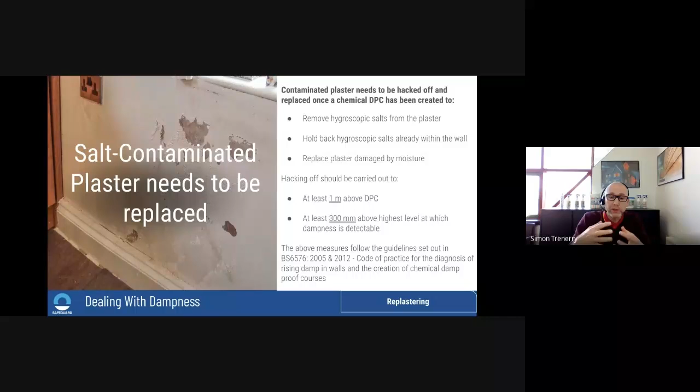So there are specific ways of dealing with this. You can use a traditional replastering system with sand and cement render on the wall. Common practice is to use an additive such as Renderguard Gold, mixed in with that render, which blocks the dampness and salts coming through. You'd then skim over with a gypsum coat, and then quite often people apply a mold resistant paint over the top. This is a traditional solution, still used by many people.

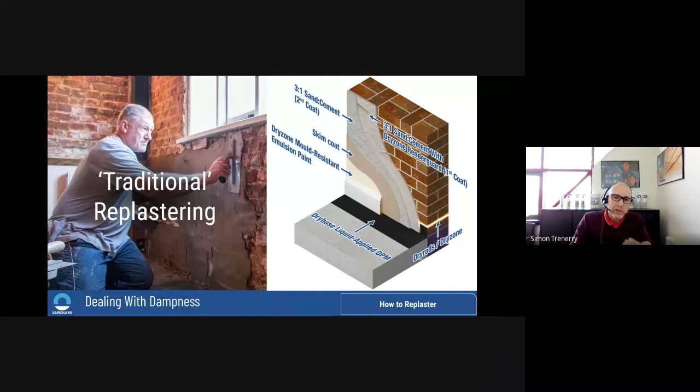There's a couple of drawbacks with it. Obviously, you've got to source the right sand for creating the render in the first place. It takes time for all those wet layers to dry out, and the drawback is it doesn't allow the wall to dry out very quickly.

Modern breathable renovation plasters are a favoured solution in many situations these days. These are pre-mixed plasters - all you do is add water. You apply 2 layers straight onto the wall. What these plasters do is hold the salts trapped in the dampness back, but the plasters themselves are breathable, so allow that dampness to work through. You then skim over the renovation plasters with a standard gypsum skim coat, which in itself is slightly breathable, but it's enough to allow the moisture in the wall to come through.

It's worth bearing in mind, walls take a long time to dry out. Typically, 25 mil of wall, so that's an inch of wall, takes a month to dry out. So if you've got a 240 mil wall, a 9-inch wall, that takes a long time to dry out. And obviously, if you don't allow the wall to dry out, that moisture, chances are it's going to go somewhere else, and that dampness could move.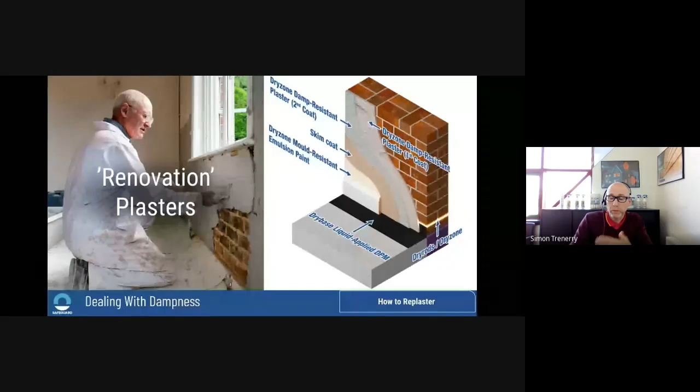So the use of a breathable renovation plaster is to be encouraged, and that can be overpainted with a mold resistant emulsion paint, or if you want to use a normal emulsion paint, if you don't feel there's a risk of condensation and mold forming. You can't use vinyl paints or papers over the top - it's not recommended. Why is that? Because they reduce the breathability and you're trapping that moisture in the wall, and that's not good for all the reasons we've just discussed.

Other solutions - sometimes it's not possible or not practical to apply plasters. You've got different layers, they need drying time between layers. It's slow, it's time consuming, it's not always the right solution. Sometimes you need to use plasterboard, particularly if you're in a commercial situation, you're a landlord and you're making good between tenancies, and the longer the property is vacant, that's costing you money.

You want to get it back into use quickly, so you want to look at using plasterboard. We have a solution for this. The existing plaster is stripped off the wall, and this is assuming, of course, you've created your DPC, etc.

Then you use our Express system. This is a 2-stage system. A cream is painted on the wall. It's a breathable cream that holds salts back, allowing the dampness in the wall to breathe again, and then you use a special adhesive to fix your plasterboard in the traditional dot and dab way, allowing the wall to breathe.

The small gap between the plasterboard and the wall allows the moisture in the wall to come through the Dryshield cream and evaporate harmlessly. It doesn't reach the plasterboard, so you don't get staining. This is a very popular solution.

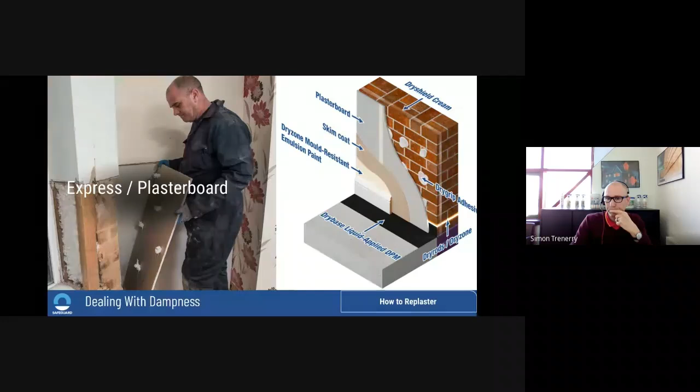I covered those points there. Another solution you can use is a physical membrane.

It's not always possible to create a damp-proof course for a variety of reasons. It might be a party wall, for example. You might have dampness on the other side, and for whatever reason the owner of the wall on the other side might not be in a position to address it, or might be unwilling. So applying something like a damp-proof course won't necessarily work.

You've got moisture coming through. You might not be able to deal with the ground levels outside - 1,000,001 reasons that might not be the solution. So another solution you can look at is applying a membrane to the wall. There's a couple of ways of doing this.

This particular system is our Drybase Flex system. It's a membrane that's adhered to the wall using an adhesive. You take your existing plaster off the wall, apply the adhesive, and then the membrane is stuck to it and smoothed out with a trowel, as in this image. That creates an impervious barrier which you can plaster straight onto.

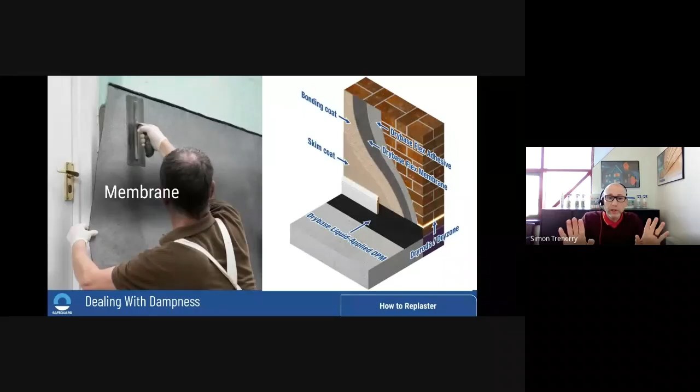This is a great solution - very quick, very popular with commercial customers - but obviously you're not dealing with the problem, you're covering it up. Sometimes that's the only solution you've got, and it's a popular solution, particularly with commercial customers.

Low profile, it's very thin, being a membrane, and can be applied to a damp substrate. Literally, you can apply it to a wet wall and plaster straight onto it. So if time is really of the essence and you've got to get in and out quickly, this is a great solution.

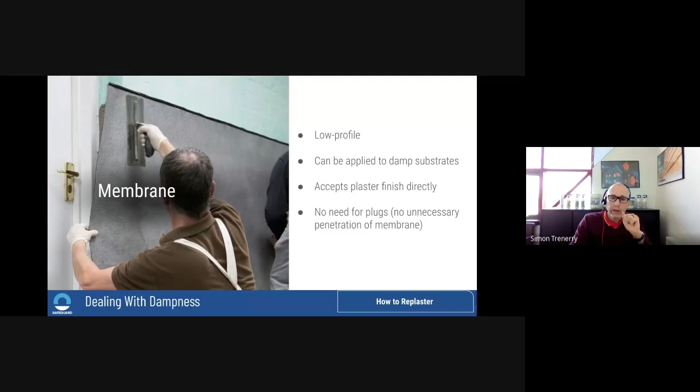Another solution is a physically fixed membrane, which might be more suitable for the job. There might be previous coatings on the wall that you just can't remove. So applying a membrane like this particular one, Oldroyd XP, which is mechanically fixed onto the wall, and then plasterboarded or plastered straight onto.

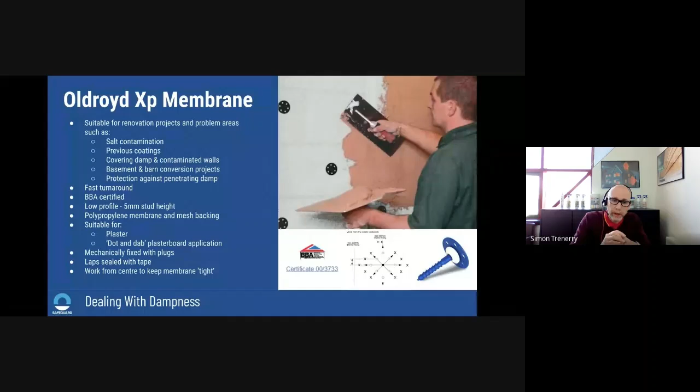It's a quick and easy system - as quickly as you can get the membrane up, you can get it plastered, and that plaster will dry out. The only thing to bear in mind with both these systems: when you plaster onto them, because they're going onto an impervious surface, the moisture in the plaster can only go one way, into the room, so it will take the plaster longer to dry out. That's just worth bearing in mind.

We're nearing the end of the presentation. Other forms of dampness: chimney damp. During combustion, when you burn logs in particular, but also with coal, initially it takes the fire a while to catch, and that's moisture cooking off from the logs, but also there is a certain amount of moisture in dry logs and in coal.

That moisture also contains salts, slightly different salts to the salts I referenced earlier with rising damp, but those salts can rise up through the chimney stack. They can then form on the interior of the stack and work their way through as that moisture dries out from inside of the stack out, and then those salts are hygroscopic, so they can attract moisture in the air, which, as we discussed earlier, is naturally occurring, and can lead to damp patches on the surface.

Also, chimneys are often out of sight, out of mind. Moisture can come in through uncapped chimneys, cracked brickwork, defective pointing, cracked flaunching. So chimney damp is another specific kind of damp - obviously it only happens where you've got a chimney.

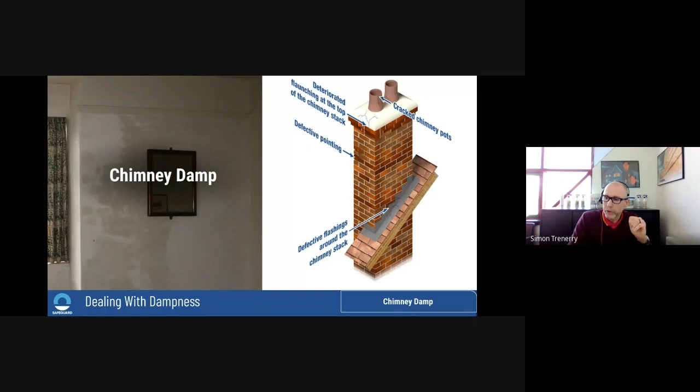Worth bearing in mind with chimney damp, because the hygroscopic salts are in the brick, your solution there would be applying something like Drybase Flex to cover the surface, since the salts are in the brick and other than removing the bricks, there isn't really another solution. Alternatively, if it's external due to pointing issues, you can repoint using the solutions we mentioned earlier, and perhaps apply Stormdry cream to weatherproof the brickwork, future-proofing it against further moisture ingress.

Damp floors are another kind of dampness. Floors aren't always laid with a DPM, particularly pre-First World War floors which often didn't have one at all. After that, up until the 60s, they often had an asphalt DPM, which doesn't last forever. Even modern houses can have issues - I had a technical inquiry recently from a customer whose builders forgot to put a DPM in the floor during an extension, so his brand new concrete slab is soaking up water and he's got dampness coming through before the extension is even finished. So damp floors are a common problem.

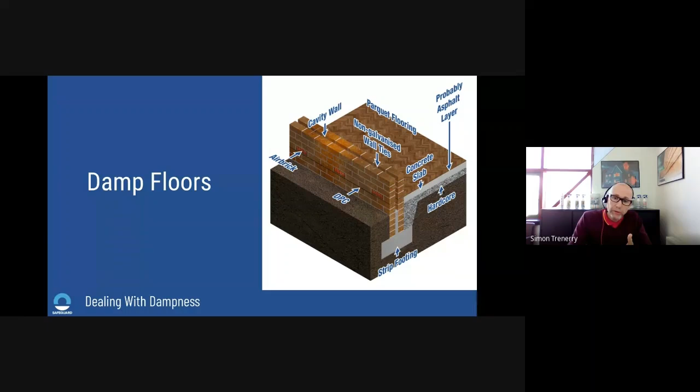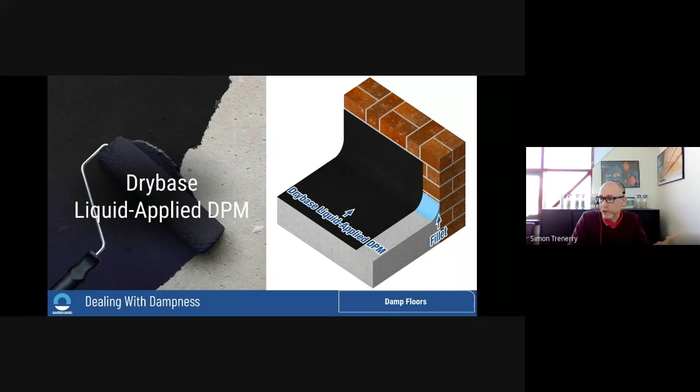If a DPM can be fitted when the floor's built, that's great, but if not, you can retrospectively fit a DPM with a couple of solutions. Our liquid applied DPM is a paint-on product, applied to a concrete floor prior to adding screeds, underfloor heating, decorative coatings, etc - a simple paint-on product. Alternatively, for a more commercial application, or one that won't be covered by a decorative coating, you can use an epoxy floor coating, which not only acts as a DPM but also as a coating.

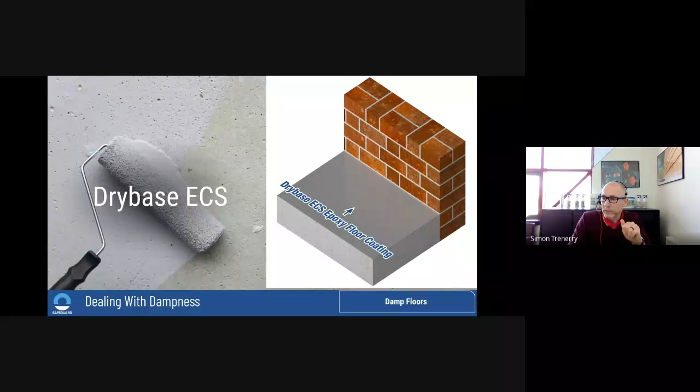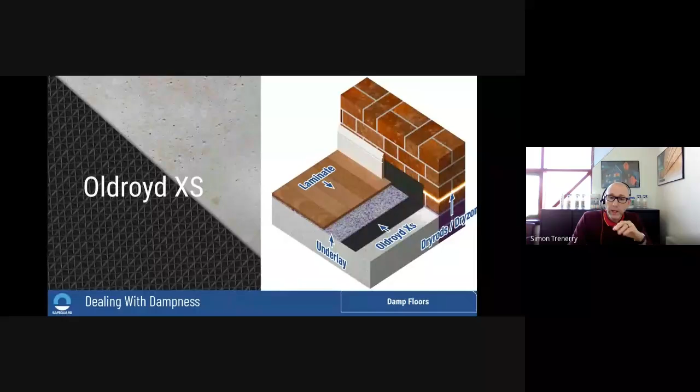This is really popular for garages, commercial users, commercial kitchens, restaurants, those kinds of applications. Being epoxy, you have to take some care mixing and applying it, but it provides a hard wearing, long lasting floor. Another solution to consider is that there are membranes you can apply on the floor - loose laid membranes onto which you apply your floor covering - these also act as a DPM and stop moisture coming up.

That's broadly covered all the main kinds of dampness.